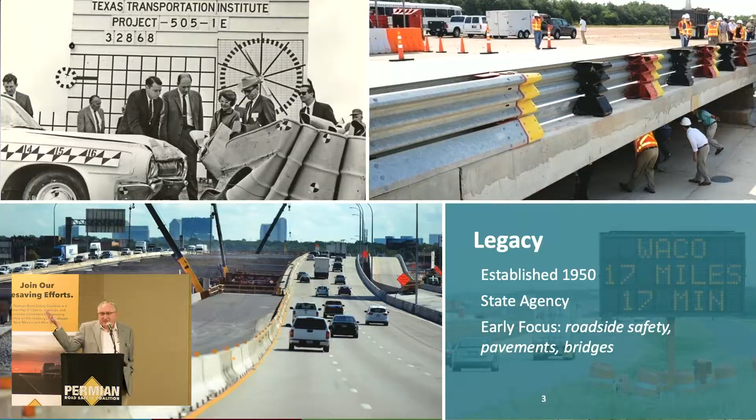Next slide. We started in 1950. Our primary focus at that time was to set engineering standards that were used nationally for roadways, for bridges, for the pavements and that sort of thing, to get us an idea of how these things should be built over the following 50, 60, 80 years. And we did a pretty good job with that. But next slide. We found that there was a lot of work to do in the process.

We have about 400 employees around the state. In fact, some of them are around the nation. We even have an office in Washington, D.C. and Qatar. And that's not Oklahoma. That's in the Middle East. So we have a lot of employees that are primarily PhD research engineer types. And then we also have about 200 employees that we pull from the ranks of our student body that are working on master's degrees in civil engineering and things like that. We bring them on as well.

We do about 700 projects a year. Those 700 projects come in a variety of flavors. So the next slide kind of gives you an idea of the things that we look at. We look at things like freight, and many of you participate in the freight studies that we've been doing in the area. We work a lot on safety, economics, planning, operations, policy. We even have a security aspect, roadway security for events that are unforeseen, shall we say. So there's a lot of these different flavors and varieties that all work together to make up the body of research within transportation engineering. Let's go to the next one.

The things we're doing today primarily, though, are centering around technology, and that technology umbrella includes autonomous vehicles. You've heard of those. Those are the ones that will kind of drive themselves, the Teslas of the world, if you will. And then also connected vehicles. That's one of the things we're going to come back to a little bit, because that's something we actually use quite a bit here in the Permian. Connected vehicles are any cars or trucks that share some sort of operational data about how a vehicle is being used.

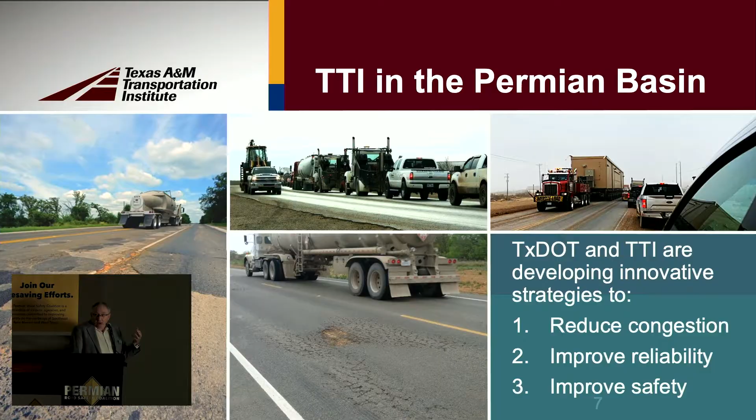And so I called TTI, and we entered into an agreement and a working relationship where we asked TTI to provide us with research. And I specifically said, I want something that I can put on the ground, because, you know, research that sits on a shelf isn't doing anybody any good. So we got some very practical results coming back from that.

I came to value those results, and we were able to make some real progress in this area using those results. Let's go to the next slide. There's three categories we want to talk about. Reducing congestion is the first. The second is going to be improving reliability, and the third is improving safety.

Next slide. The first thing we did when we started over was to identify the things that we needed to do to improve the congestion in the area. Now, congestion in a rural setting is not the same as congestion anywhere else. Congestion in Houston is sitting in traffic back to back and not moving for hours. It's different out here. It's going 75 miles an hour at least, and then coming down to a zero and sitting there trying to figure out what's happening way up ahead.

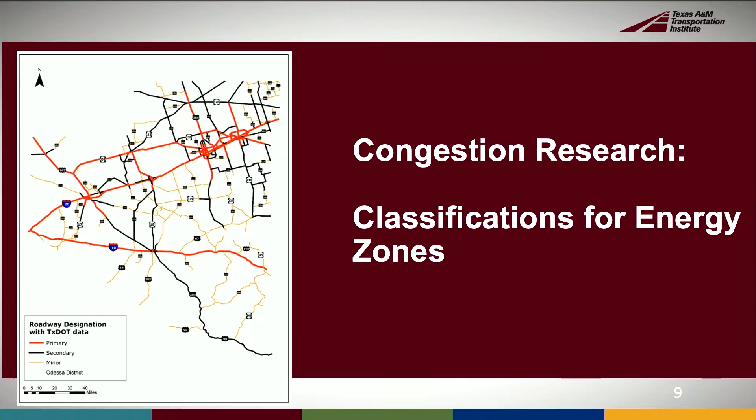So that's a certain type of a roadway classification. It didn't show up in any literature anywhere else. Real research pulled it together, and we said, okay, now you got different classifications of roadways with different characteristics. What do you do? Next slide.

We created an access management tool that says that when you're putting in a roadway or driveway on one of our roadways that's in the sand hauling zone, it has to look a certain way. It has to have a certain amount of space for left-hand turns. You have to have a left-hand turn bay, have to have acceleration, deceleration lanes depending on what's going into that driveway. Those types of things remove the congestion because it allows people to get out of the way of everyone else and more effectively and smoothly get in and out of where they're trying to go.

Those kinds of things produce one data point in the whole overall big picture. It allows us to say, here's something that we know we need to fix, we fix it, and then do it again a few feet down the road or a few miles down the road, and pretty soon you have something that begins to make a change in the way that traffic behaves.

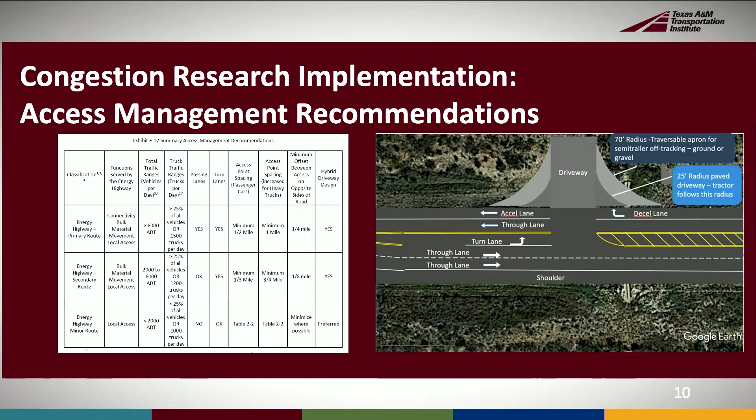And yes, we do have less congestion than we had back at our peak, and the peak was about 2018 in terms of our congestion. Most of this started going into place in 2017, 2018, and really started catching on in 2019. And it's been moving forward ever since. Next slide, please. So that's one category.

The second category, though, is one that's kind of strange, that you would think we would know a lot about: pavements. And we do. With transportation engineering, that's kind of what we do. But in order to improve the reliability of the pavements, we have to know how those pavements are being used. And especially, we need to know how trucks are using them, because trucks are the ones that make most of the damage on the roadways. So you have to design for trucks. That's kind of the thought process.

So the next slide. What we found out is we didn't really know what those trucks look like. We decided that we'd have to go in and go from scratch. The Permian is unique. Start over. We went back and identified what the traffic data needed to be for putting these things together, and we discovered that the trucks were way heavier than we ever thought. There are a whole lot more of them than we ever measured, and there are a tremendous number of trucks that just don't match any description whatsoever that is found within traditional engineering practice.

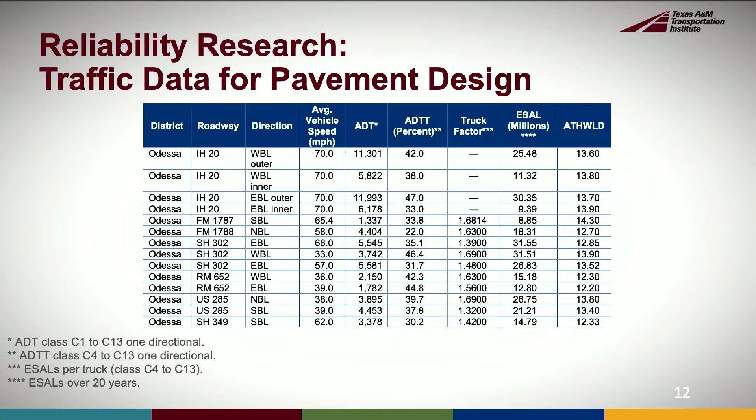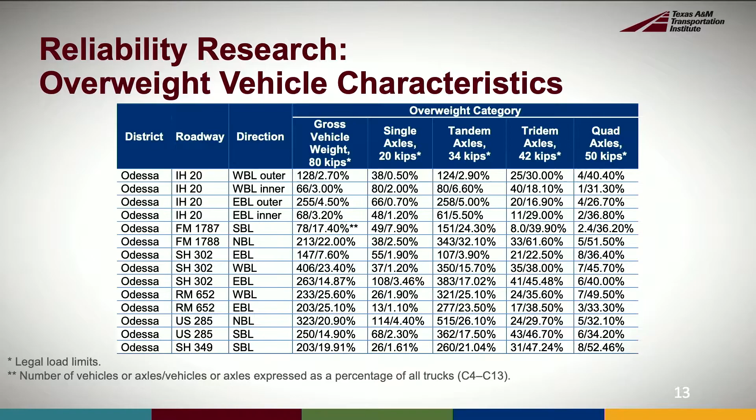Next slide. So we had to redo that, and we also took a look at what the overweight vehicles were looking like when they were permitted. Don't worry about the numbers on here. I can't even read them. The main thing is that it was all heavier than we thought it was. And then the next slide, turns out not only that, they were heavier than they were permitted for.

We actually had TTI take a portable weigh-in-motion pad, put it out there on the pavement in a whole lot of places where they'd never been placed before, and we discovered that some of these permitted trucks were overloaded by up to 30-35%. Some of the unpermitted ones, we don't want to talk about those, but they were way beyond anything that we had imagined. And when you start putting all this together, we had to start over on how we were doing pavements. Now, TxDOT knows a lot about pavements, but what we discovered is that this region is different, and so we have to start tracking it on a routine basis.

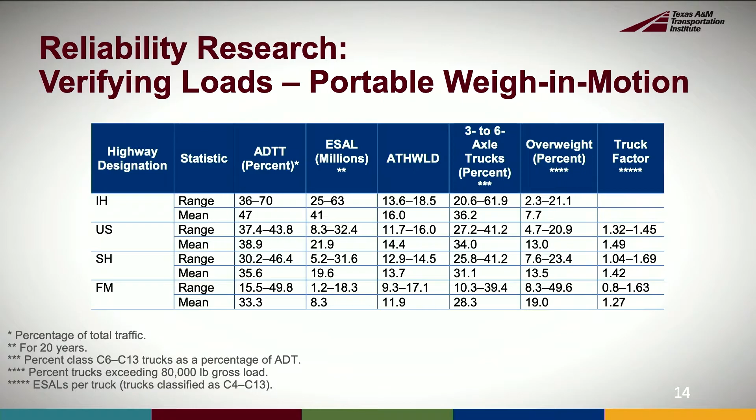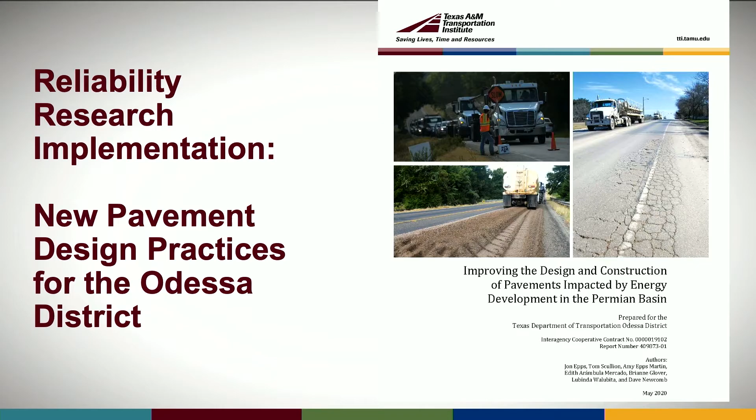And so using this information, we were able to extrapolate out, and next slide, we came up with a document that was actually put into use in the Odessa district for pavement designs. The designs are thicker, they're heavier, different materials. They're more expensive initially, but they're a whole lot less expensive over time because they last longer and you don't have to go out and fix them all the darn time. So you have a cost-effective cost-benefit ratio that saves the taxpayer money, and it keeps those roadways reliable so you can get in and out, do your business, and do it without having to dodge around a pothole or an edge of pavement that's falling away.

Next slide. Now, the last category of research that we looked at was improving safety. It turns out that the biggest thing we really didn't have when it came to safety was good data. And so we had to take a step back and decide how we were going to work on getting data that was current, that we could use to make on-the-fly changes to improve safety at specific locations. So what we did, next slide, is we honed in on something that TTI has been working on and is probably the leader in the nation right now, and that's the use of connected vehicle.

Okay, what's a connected vehicle? I can guarantee you if you have a car or a truck that is newer than about 2015, you are driving a connected vehicle. A connected vehicle right now is put out there in your hands, and the trucks are the same way. The manufacturers will install data telemetry that will give those manufacturers information to make their vehicles more efficient, safer, and will allow them to better prepare the next generation of vehicles as they go into the manufacturing process. All of that data is then taken and stripped of all of its personal identification information and sold to a third party. Next slide.

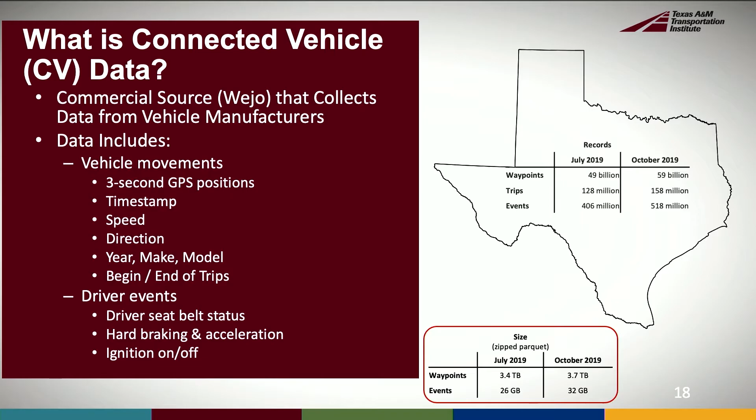It gives you a lot about driver events. And this is really important because it tells you whether your seatbelt is connected. It tells you whether or not you're having what we call a hard braking or a rapid acceleration going on. That information in turn tells us where problems are occurring on the road. If they keep having hard braking at one location, that's a problem. So it's a problem that we can potentially fix through an infrastructure fix. So next slide.

So we started off with the easy stuff. We took some of this Wejo data, the connected vehicle data, and identified a speed profile for a particular location. This one was done as a part of an accident out just to the west of Kermit. This was when that project to build the bridge on 302 across 115 and the railroad started. Just west of there was a fatality, and a young girl was killed when a truck rear-ended him.

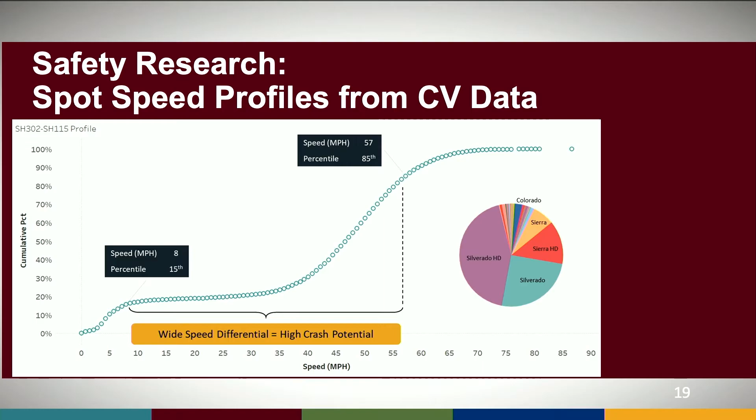So we built this profile, and what it told us is that the speeds approaching that particular area were far too high. So what can we do to fix that? So the next slide, what we ended up doing is putting together the data to try and identify where that too high speed is, and started backing out the slow down signs, even added additional rumble strips. Some of you probably drove across them, added additional lighting and signage for certain types of characteristics, and it removed the problem. We no longer had fatalities or injury accidents at that location.

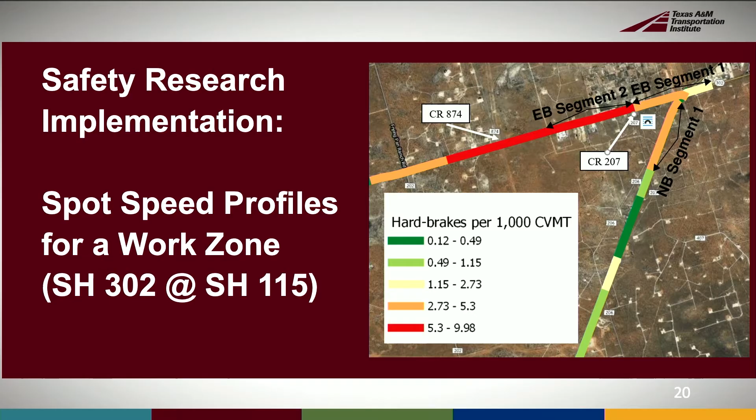So it's something that we were able to take the data, instead of leaving it on the shelf, we were able to put it to work. The time from the time the accident occurred to the time that the implementation was done was less than a week. So we didn't have to go out and find out what was happening or identify it. We were able to scientifically, in an engineering fashion, identify what needed to be done. That is real progress using research.

Next slide, please. There are another set of areas where we use this kind of connected data. We also use some traditional data on this. We looked at the way in which crashes were occurring and where they were occurring on the roadways in the Texas side. 4-lane undivided roadways had a pretty high level of fatal and injury accidents. And then you'll see down below the 4-lane divided roadways have a much lower. Well, both of those are fairly expensive to build, but the most expensive is a 4-lane divided.

Then we looked at our 2-lane with 6-foot shoulders, which was kind of a typical standard for the roadways we wanted to look at. And we discovered that it fell somewhere in between. That's kind of what we expected. The rates were all higher in the Permian than they were anywhere else, but that's also to be expected because we're different. We really are.

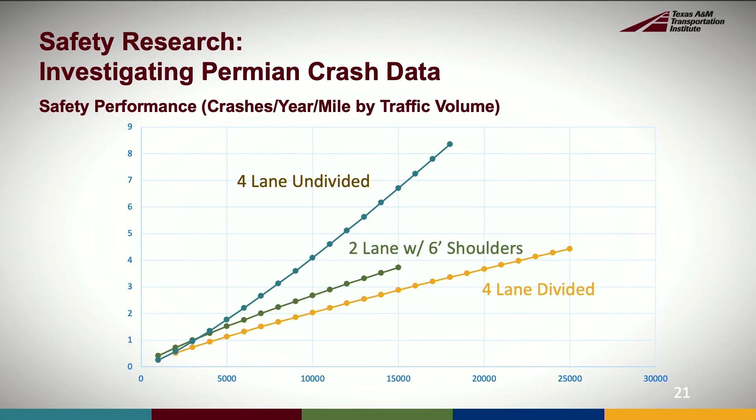So the next slide. Then we took the connected vehicle data and superimposed a lot of the data that we had on roadways throughout the state of Texas, where there were also fracking operations in place, and we discovered something very important. There are roads called Super 2s, where you have 2 lanes going in one direction, 1 lane coming in the other direction, and you just alternate them off. 2 miles of 2 lanes in one direction, 1 lane's coming at you, then you flip it over. And that gives you a chance to pass and move around a little bit more conveniently.

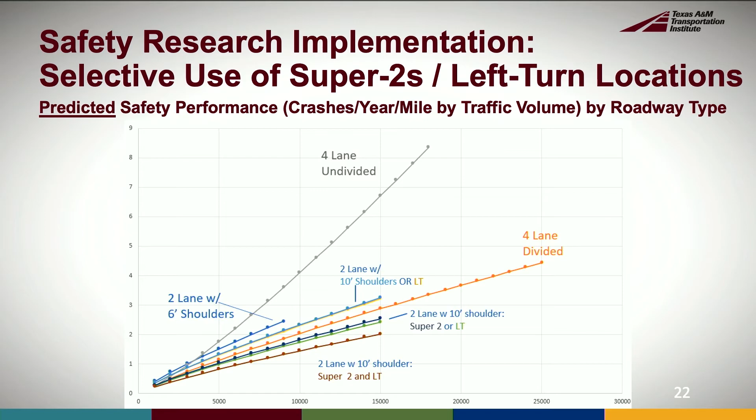Turns out the accident rates are actually lower on those than they are on 4-lane divided when you're talking about small volumes of traffic. And small is relative. We're talking about 15,000 vehicles a day. That's more than on most of the roadways in this area. What that told us is we could reprogram all of our roads, all of the construction that we had listed, and we could set it up to where the amount of money that we would spend would allow us to go further and faster. We were able to put down Super 2s where we thought we were going to have to wait for money for 4-lane divideds. And we were going to be able to put Super 2s down in a fraction of the time and a fraction of the cost in the same right-of-way.

So all of a sudden, you're seeing us put a lot of Super 2s in Texas, in the Permian, because they're actually safer than the 4-lane divided highways. You can't get as fast on the Super 2s as you can on a 4-lane divided, so that's part of the reason. But part of the reason is they're manageable. You can see what's happening. You can slow down, and you will not have as many obstructions and conflicts that are unmanageable and unexpected. It's a tremendous opportunity, and it saved us millions in the process, and it allows us to get those projects done faster.

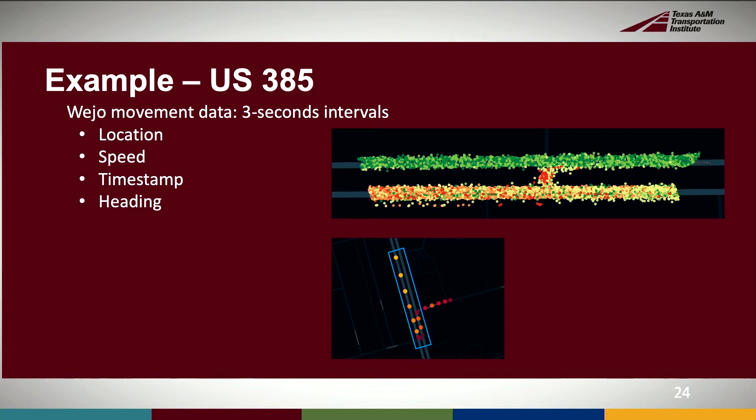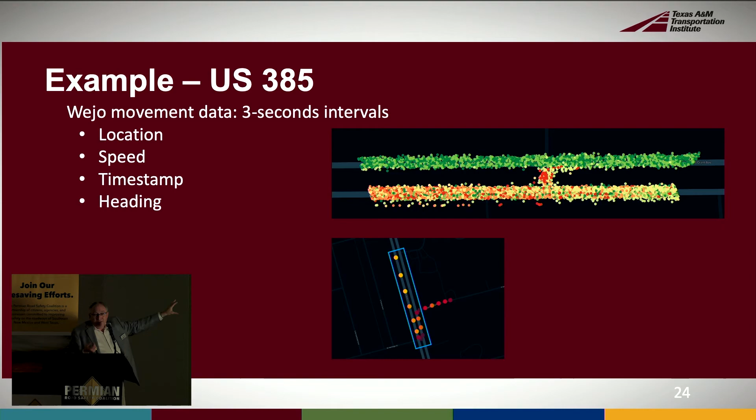That change is being made with a field change, and it doesn't cost us a whole lot, but it's something that can be done quickly, efficiently, using data that's readily available. So those are just examples of what we've found when it comes to using this kind of data, and it's beginning to pay off because this data is fairly inexpensive to get. It's a whole lot cheaper than sending a field crew out. So what we like to do at TTI is take these kinds of ideas and see how far we can push them, and then see where we can drop them in to where it'll make a difference to the taxpayers when it comes to your investment in your roadways.

One last thing to comment on. Let's go to that next slide. We have a variety of things we're looking at, correlating some Wavetronix to weigh-in-motion, pilot signing. You're going to see some different signing on the Texas side. But the reality is that over the past few years, we've seen results. Nationwide, traffic accidents have gone up. Crashes have gone up for fatalities. Since 2019, they have just continually gone up, and then last year, they skyrocketed. Fatal accidents and injury accidents. In the TxDOT Odessa district, since 2019, the fatal accidents have dropped 33%. The number of injury accidents have dropped 32%.

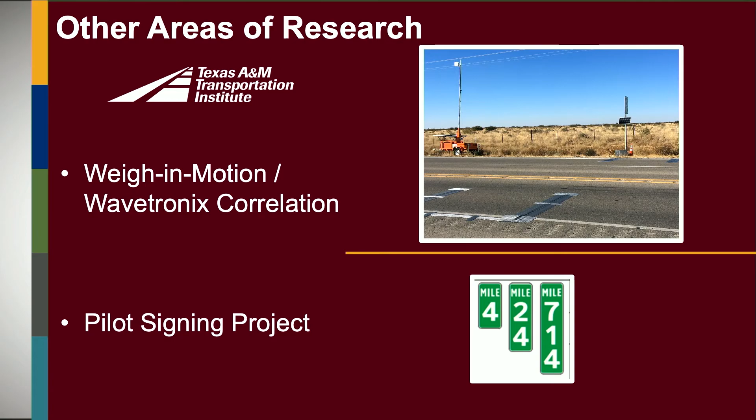When you put that into real lives, we're talking about 180 people who are alive today that would have been predicted to have not made it out of an accident because of some of these changes and the actions of the Permian Road Safety Coalition to make the awareness that's necessary available to the folks in this room and to the industry as a whole. That's 180 people that are alive today. 1,643 people who did not get injured on those roads during that time period because we're using research to better hone in and decide what needs to be done. Because we're getting together and sharing ideas that save lives. That's what it's all about.

So if I die today, I will die today knowing that at least somebody out there is able to go back and see their families that wouldn't have been able to do that otherwise. And that makes me a very happy camper.

So in the interest of not getting killed early and being run over because I'm standing between everyone and lunch, I think probably the best thing for me to do is go ahead and stop while I'm ahead. And do we have time for questions? We do have time for a couple of questions. Okay. Do we have any questions, or is everybody hungry? You know how I ask that.

Sir, go ahead. Is anybody looking at widening between Jal and Kermit? That's a very dangerous road right there. You're talking about 18 between Jal and Kermit. I retired, so I'm going from memory, but I believe that the roadway on the Texas side, State Highway 18 from the New Mexico county line south, is scheduled to go to contract within the next 6 months to a year. And yes, it's going to be widened with additional turning mechanisms and better shoulders, because the shoulders keep getting eaten by trucks that pull off. I don't know. I'm going to have to toss it over to Francisco. Do you know anything about 18?